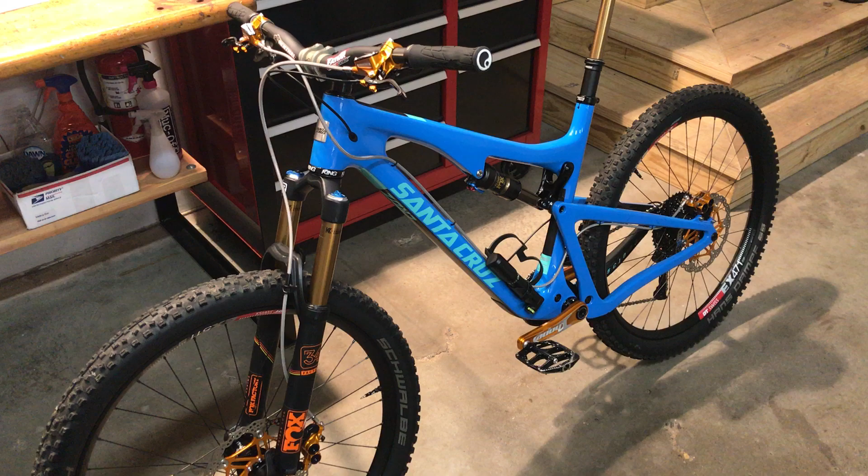Okay, this is a follow-up video to a previous video I had posted about an issue that I was having with my Hope V4 brakes with Tech 3 levers. And I'll put a link to that original video in this one if you want to go back and watch that if you haven't seen it.

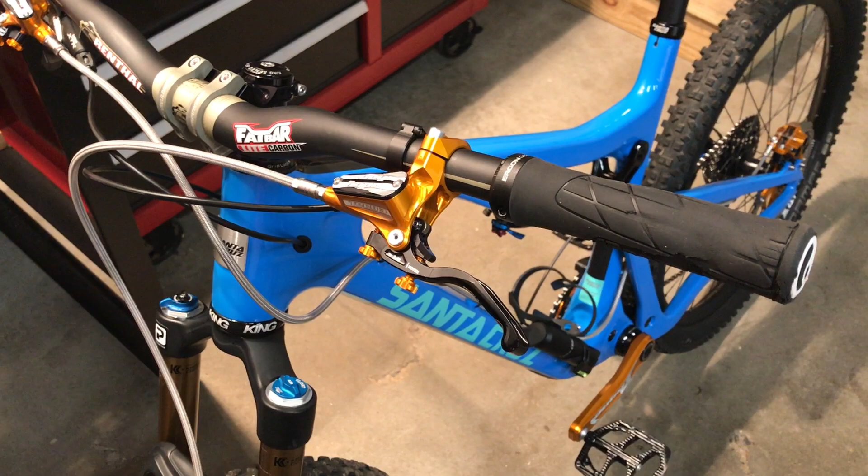But really the only reason I posted that first video was because when I contacted Hope about the issue I was having, I put a link to that video in the email because I thought it would be easier for them just to watch the video than for me to try to describe what was happening. But quite a few people ended up watching that video, and several people commented on it. A few people commented and just asked if I had figured out what the problem was and what I did to correct it. And a few other people had commented with what they thought the problem was.

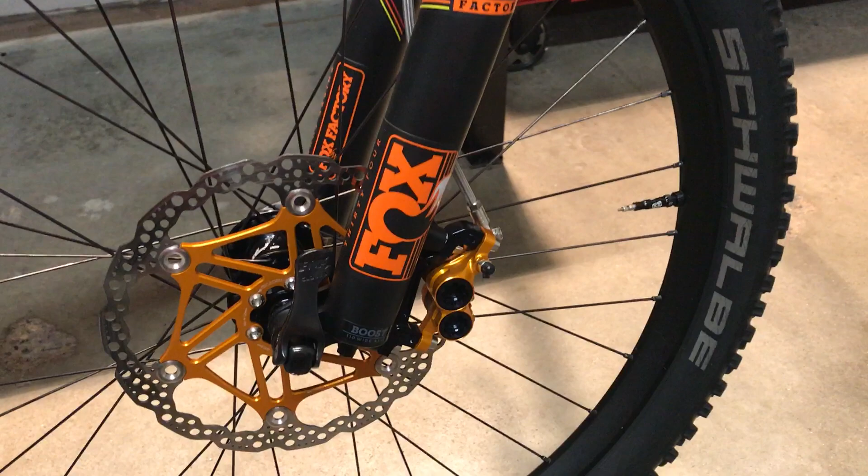And that video was posted about 6 months ago, and even recently I've had a few more comments on it, so I thought it might be easier to just do a follow-up video, and hopefully anyone who's still curious or wondering what the problem was, hopefully this video will maybe answer any questions or clear anything up. So just a warning, this probably won't be the most exciting video because I'm just going to be talking through all of it, but if you're interested or even just curious to know what the problem and what the solution was, stay tuned.

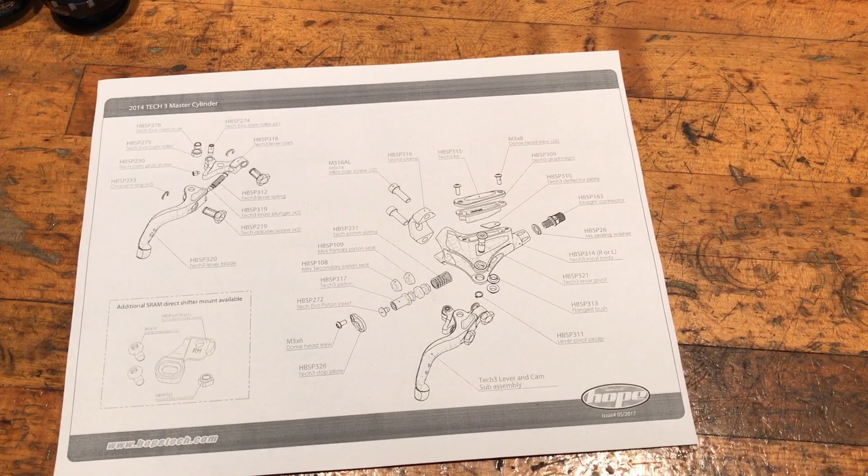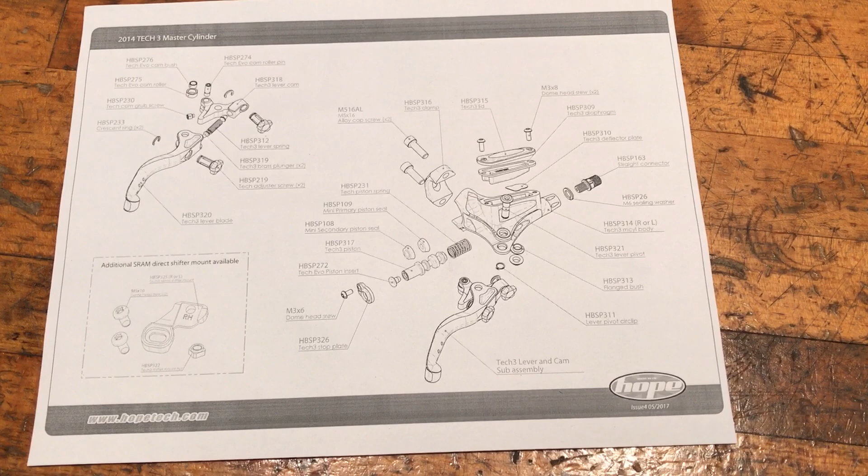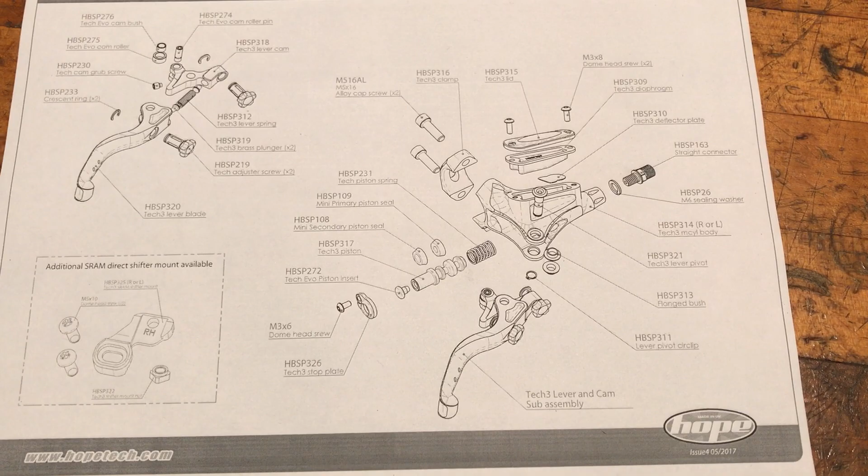So one of the nice things about Hope is that on their website they have instructions and technical information about pretty much all of their products, and this is an exploded view of the Tech 3 master cylinder, which is what I have. And at first, again, I'll put a link to that first video and you can go back and watch that and see what was actually happening.

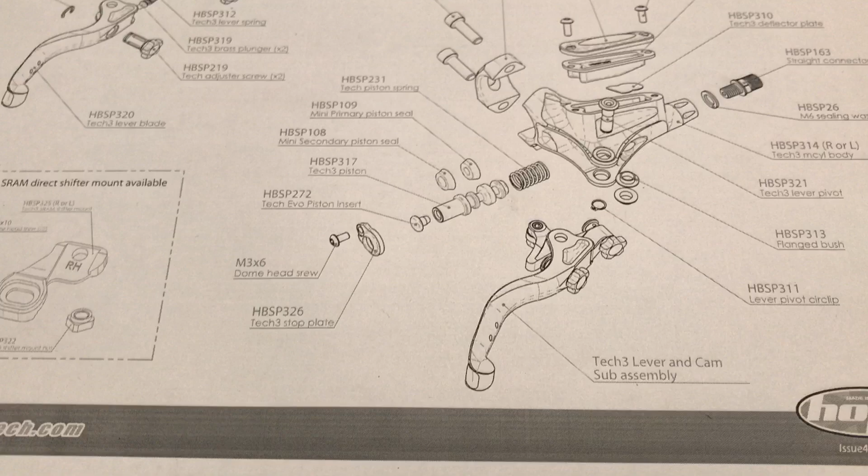But some people who commented thought that I just had air in the system, and that's what I thought at first as well. So when you first get the brakes, they come pre-bled, but then when I installed them, I shortened the lines, so I bled them after that just to make sure I didn't have any air in the system. But the front brake was still acting up a little bit, so I bled them again. I think I bled them 3 times total, just to make absolutely sure there was no air in the system. And I bled them properly per what Hope recommends and rolled the diaphragm and did the whole process.

So I was pretty certain there was no air in the system, and I figured it had to be something else. And when Hope responded to me, which they responded quickly, which was nice, they said that they suspected it was the primary seal on the piston. So you've got the piston here that the lever pushes on whenever you squeeze the lever, and there's 2 seals, the primary seal and the secondary seal.

And what was happening with mine was that the oil somehow was leaking past this primary seal. So I could just pump the lever over and over and make the brakes so that the lever was pulled all the way in, but the pads weren't grabbing the disc at all. And that's because there was oil leaking past this primary seal and it couldn't build any pressure. So it wasn't air in the system, it was the fact that there was oil leaking past this primary seal.

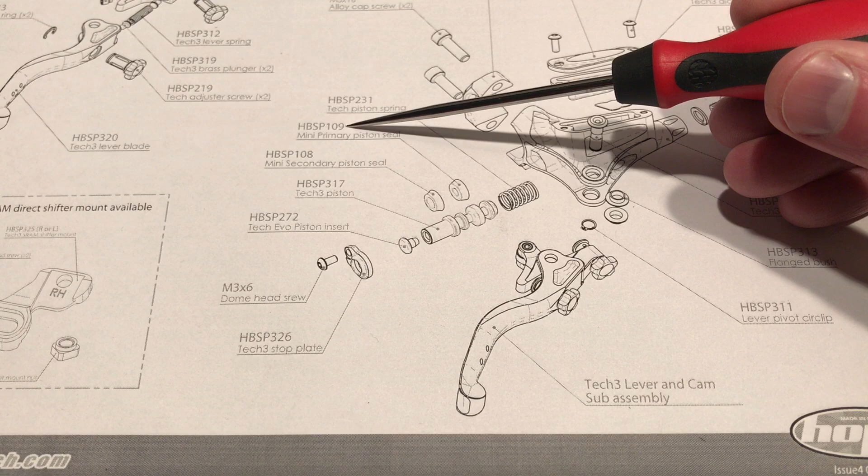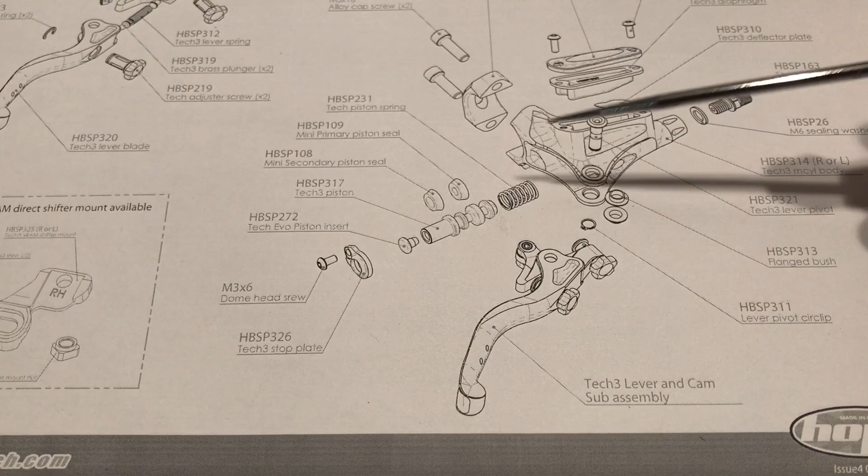And these 2 seals, there's something different about them because they are 2 different part numbers. The primary seal part number ends in 09, and the secondary seal part number ends in 08. So there's something different about them. I'm not sure what it is, if they're a different compound or something like that, but it also looks like the inside diameter of the 2 seals is different. The ID of the secondary seal looks a little bit larger than the ID of the primary seal. This is just a diagram, but it looks that way.

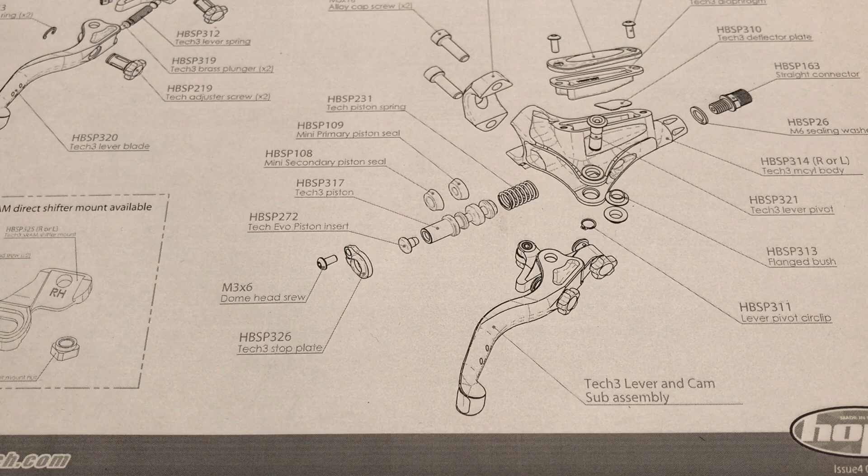And if that's true, they might be doing that just to be able to tell the 2 seals apart, because they're both black in color, they both look the same from the outside. So having a different inside diameter would be a way to tell them apart. And the other benefit of that is that it would prevent the primary seal from being installed where a secondary seal should go, because the inside diameter would be too small for it to fit, but it would not prevent a secondary seal from being installed where a primary seal should go.

And maybe that's what happened with mine. I'm not sure. I didn't try to take the original seals off of the piston on mine to see if it was in fact 2 secondary seals installed instead of a primary and a secondary.

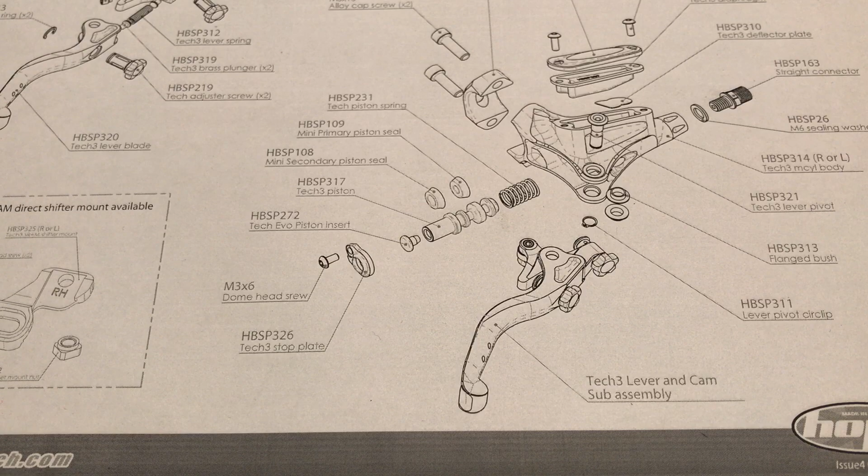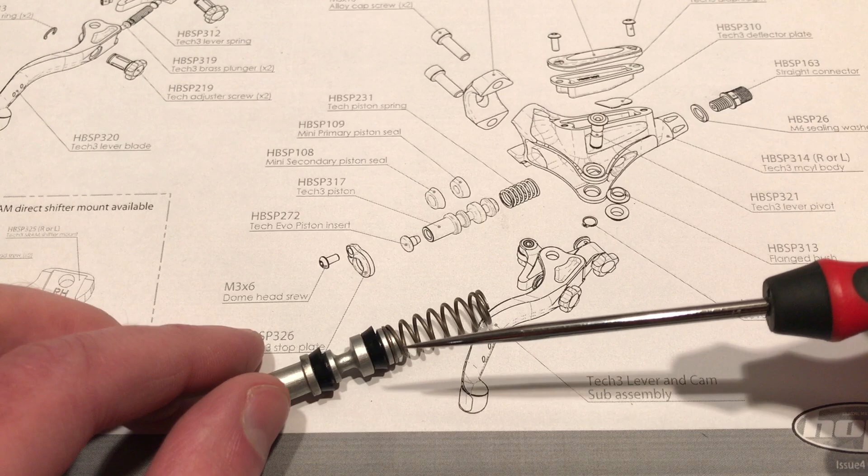And actually, when I did pull out the original piston and seals, everything looked fine. So this is the primary seal right here, and the seal looks okay. There's not any tears on the seal, or I didn't notice any debris trapped in the seal anywhere. So it looks fine to the naked eye. Maybe if I would look at it under a microscope, I could see something.

But I'm not sure what the cause of the oil leaking past the seal was. Whether it was 2 secondary seals installed by mistake, or something wrong with the primary seal. Maybe it was just a bad batch of seals. The rubber compound maybe wasn't right. Or maybe there's something I would see under a microscope. But regardless of what it was, that's what the cause of the problem was. The fact that there was oil somehow leaking past that primary seal.

And when I contacted Hope, again, they were quick to respond, which was nice. And they said that because I'm located in the US, and Hope is in the UK, I think anyone outside the UK, as far as warranty work, Hope wants you to send the parts back to where you purchased them. But I ended up purchasing these from an online retailer who's also in the UK. And rather than sending them back and going through the warranty process, because that would have taken time, they said that they could just send me a new piston with seals.

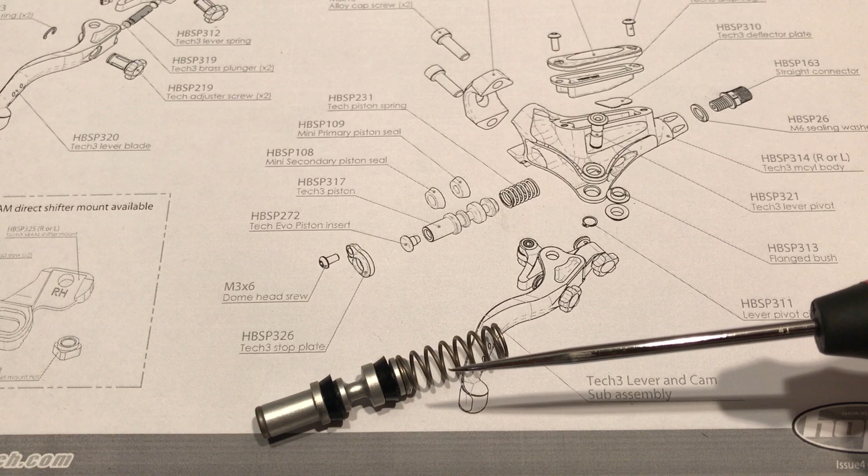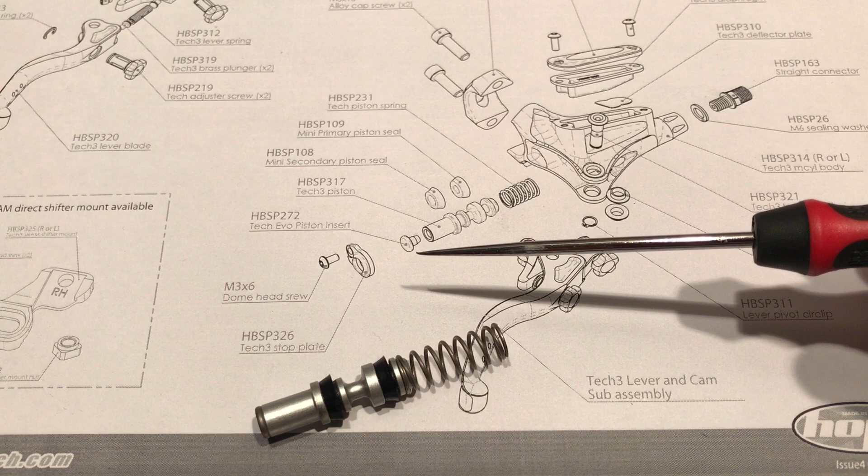So this whole little sub-assembly of the piston and seals, the spring, and then this insert piece in the end, this piece right here that the lever actually pushes on. They sent me that whole piece in the post at no charge, of course, and I just replaced it myself because I said I was willing to do that. And it wasn't too difficult to replace. It did take some special tools, or one special tool at least.

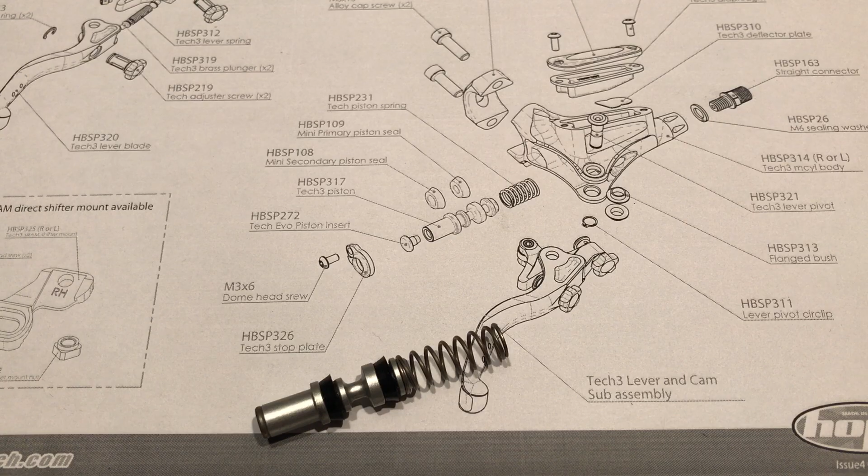And I guess the only other thing is that the bike that these are installed on, I am planning to completely disassemble this bike in the next couple months. I'm located in the US, and it's getting to be winter here. We've actually already had a little bit of snow where I'm at, and I don't ride this bike in the winter, so that gives me a chance to do some maintenance and rebuilding on it. And I will be stripping it completely down to the frame and just going through everything and freshening it up. And one of the things I'll be doing is changing all the bearings in the suspension linkages.

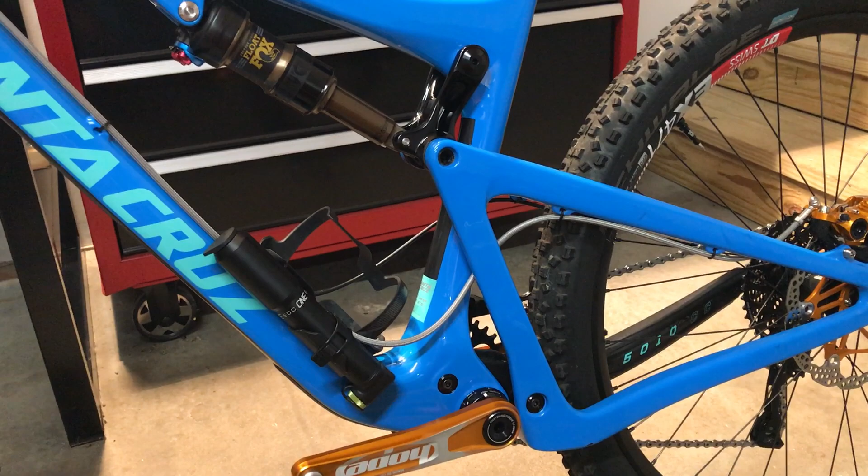And I have done that once before, but I'll do some videos of it this time. If anyone's interested in seeing that, I do have a couple of the special tools that make that easier. And then I actually made some of my own tools to do that as well, and they work pretty good for that. So I'll definitely do some videos of that.